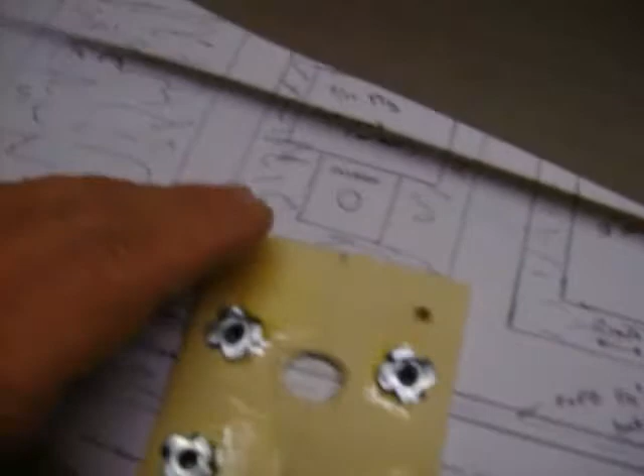Alright, we're going to mount the firewall. You see I epoxied my blind nuts back in there a little bit. I left the edges without epoxy because I'm going to put some triangular stock down the framing.

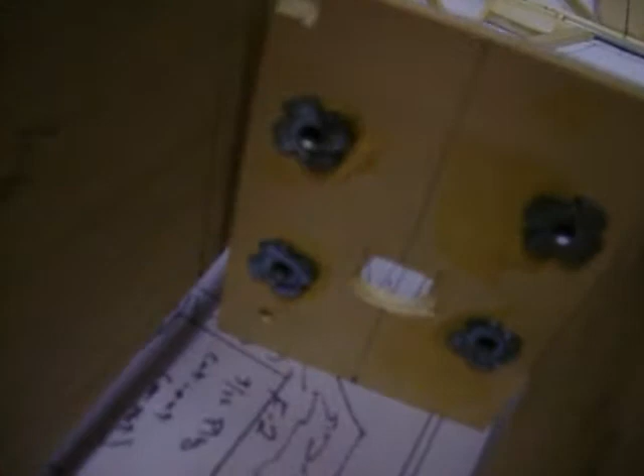As you can see, when the firewall sits in here, I'm just going to put some triangle stock right down the side, and that's going to help brace up the firewall a little better and heat it so it'll be looking like that. But you can see it's going to touch my blind nuts, so I'm going to need to carve that part out. I didn't really want to have glue in the way, so when I epoxy the triangles in, then I'll finish epoxying the blind nuts.

It's not a huge big deal. You can just cut around it anyway. But that's what I'm going to do. They're in there pretty good.

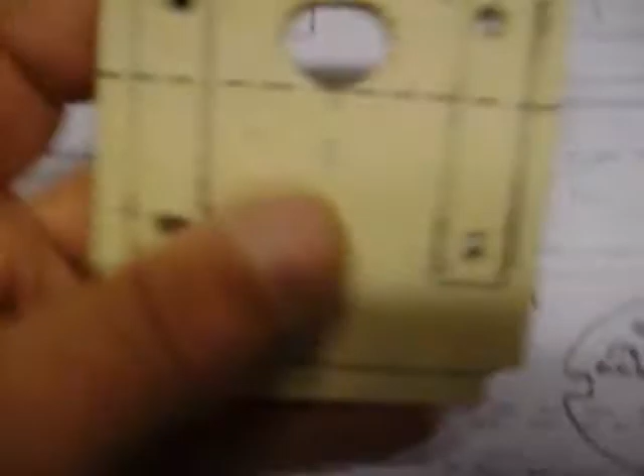Drilled my hole for my gas tank. I told you to go ahead and drill 1/4 inch holes. I happen to know where my gas tank's going to be, and I'm using the straight angle tank, so I just made it wide enough so both lines can come through at the same time. Or you can do 2 separate 1/4 inch holes like I told you, and then run your tubes out from inside to wherever you need them. It only needs a 1/4 inch to come out the front, so either way is fine.

I decided to go with the bigger hole because my two things are so close together that the 1/4 inch holes are pretty much going to join them anyway. And it's a straight tank.

If I had a vertical tank where it was kind of angled like this tank, then it's nice because when it sits in there, the metal tubes aren't right up against the firewall, so that's where the 1/4 inch holes come in nice. That's what I was getting at before. I probably should have shown you that before, but hey, I messed up.

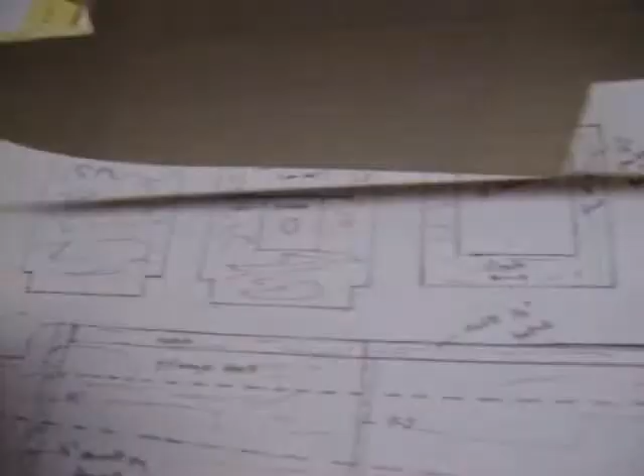Okay, so what we're going to do here is mount the firewall, and I want to talk a little bit about thrust. When you're dealing with your firewall, you want to put some right thrust on the motor. There's a couple ways to do that, as we discussed earlier.

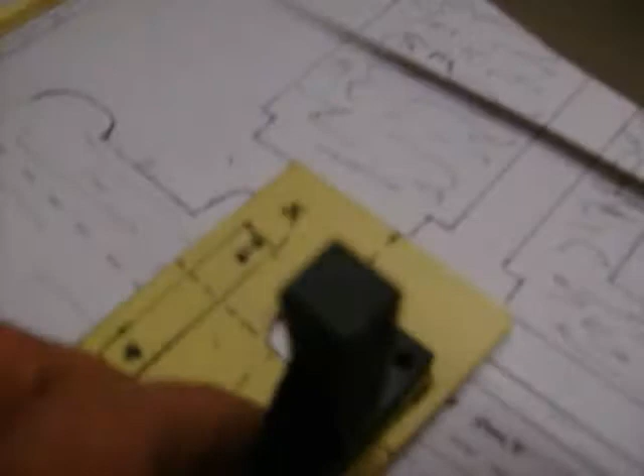You can either put some washers right behind the screws before you put your engine mounts down. Basically we want to get about 2° right thrust, maybe 1° or 2° down thrust as well. So you can put some washers right behind here, just lay them on the board before you screw this in, or when you're screwing your engine mount in, you could just put the screws right through it and put the washers on the back. You might want maybe 1 or 2 washers, an 1/8 inch thick washer, which is probably what we're trying to achieve anyway.

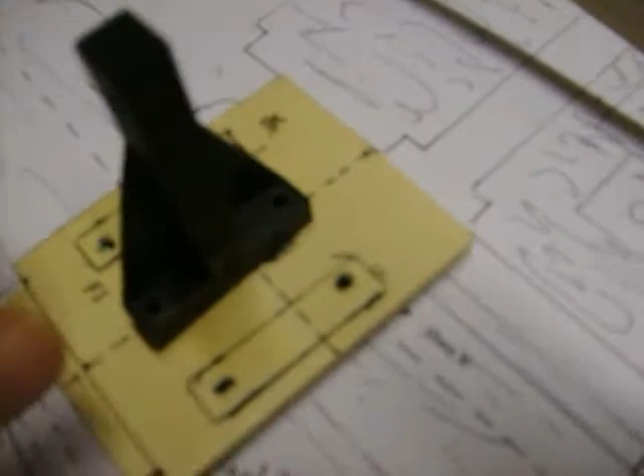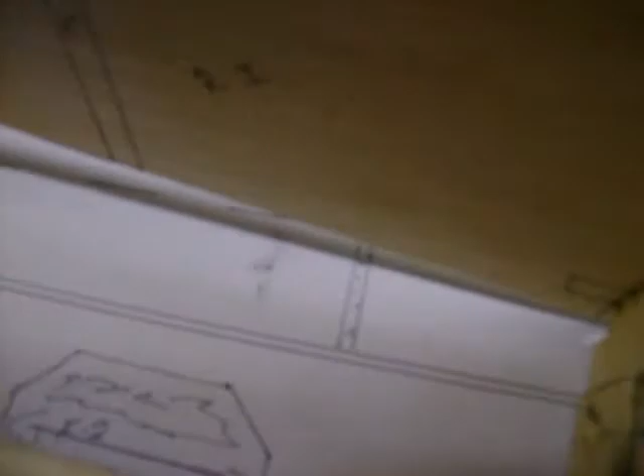Another way to do it is to take your left fuselage side, where your engine plate or firewall is going to mount up to it, you can take an 1/8 inch by 1/8 inch square. I'm trying to do it so you can see, but it gets awful dark in there. Just take right at the very back of your line.

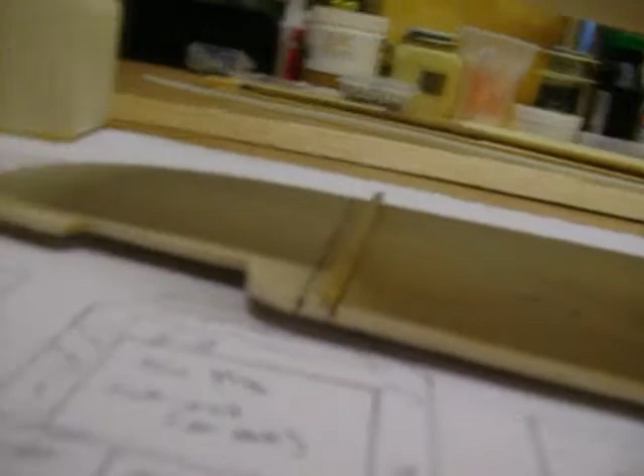You can just take the 1/8 inch by 1/8 inch and glue it in, zap it right down against the very back line. So now you've got an 1/8 inch by 1/8 inch piece right there, and when you put your firewall in, you're going to put it directly on your back line on the top part of the fuselage, on your right fuselage, and up against this brace here, and that'll automatically offset it.

The reason I'm not going to do it this way on this particular plane is because I'm using a pop hatch, so the front pop hatch will have that little bit of an angle, as you can see. Now I got a little bit of right thrust in there if you're looking at it straight.

I don't know if you can really tell or not, but it's just sitting in front of that 1/8 inch piece. So when you put your engine mount on there, you'll have your right thrust of 2 degrees with that 1/8 inch piece right against the back of the wall, and that'll give it to you. Or you can just use the washers on the outside, which is what I'm going to do.

But with the pop hatch, you're going to have an angle on the front of it. Not that it's a big deal, but I want mine to look straight, so I'm going to go ahead and put it in here, and I'll offset the thrust with the motor mount.

Alright, I've pre-glued or pre-mixed some epoxy up. You want to have your clamps or rubber bands on hand. And we're just going to go ahead and mount the firewall right to the marks you made. So I'm just taking my epoxy and we're going to generously coat just the sides.

That's going to be it, really. Lots of paper towels on hand, and like I said, your clamps and rubber bands. Don't get any glue in these corners here because that's where your bracing for your landing gear is going to go, for running down the struts, or running across the landing gear block. So I got my paper towels on hand, gave it some glue. Not too much, you don't want to be scraping everything off. Just enough to bond it in there.